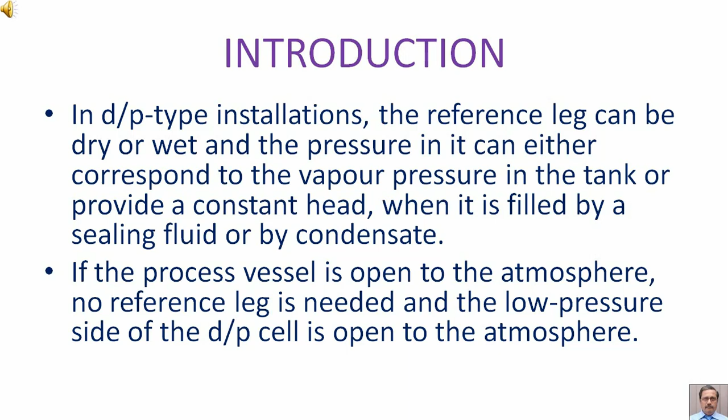Clean liquids in atmospheric tanks. Unpressurized vessels containing clean liquids are the least demanding as far as level measurement is concerned, because the two most common sources of difficulties, vapor pressure compensation and plugging, are not present.

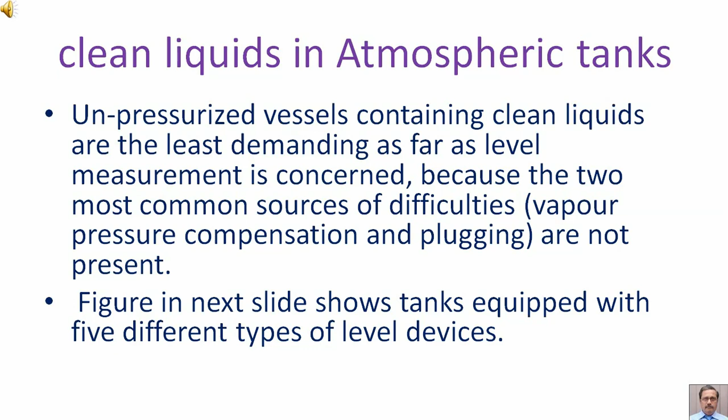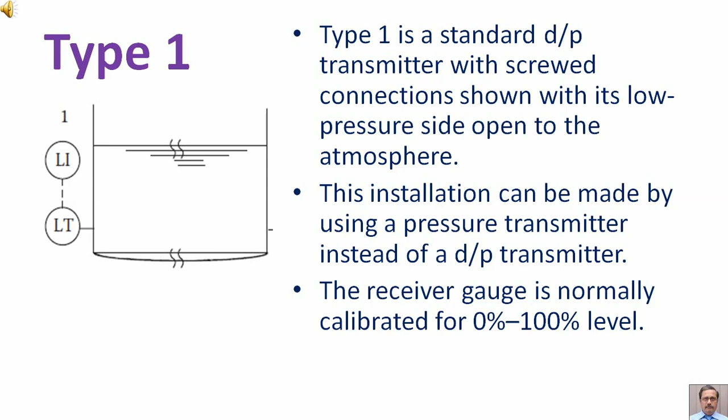Type 1. Type 1 is a standard differential pressure transmitter with screwed connections, shown with its low pressure side open to the atmosphere. This installation can be made by using a pressure transmitter instead of a differential pressure transmitter. The receiver gauge is normally calibrated for 0% to 100% level.

Type 2. The flat diaphragm type differential pressure transmitter is shown in tank installation 2. Compared to the standard differential pressure cell, the flat diaphragm type transmitter is simpler to install and is nozzle mounted, requiring no other means of support.

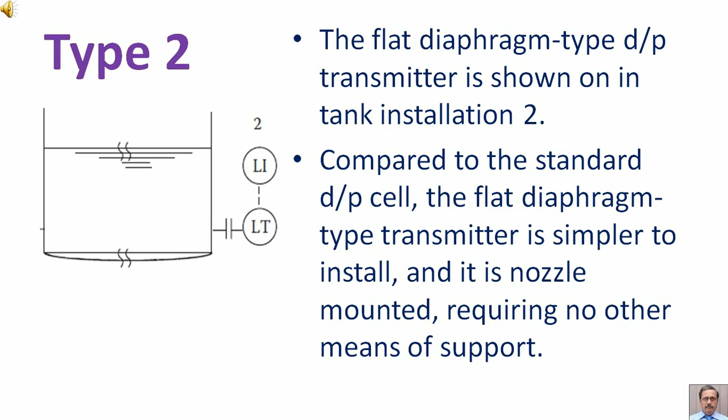It also can be less expensive because only the diaphragm and the retaining ring are in contact with the process. As a result, only these parts must be made of corrosion resistant materials, whereas in the standard differential pressure cell, the entire body is exposed to the process fluids.

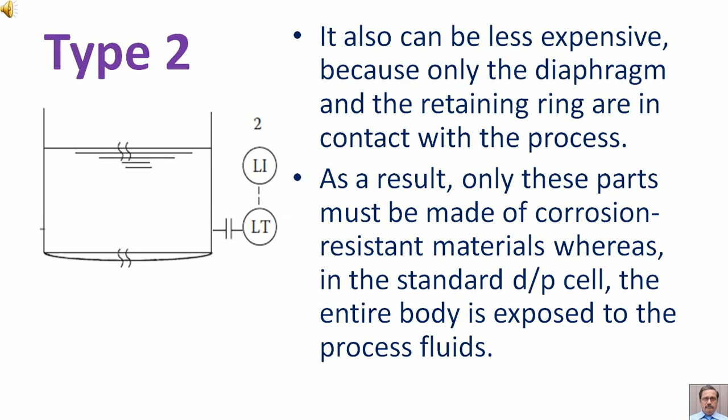Extended mount diaphragm seal differential pressure cell, that is A. Flush mount diaphragm seal differential pressure cell, that is B.

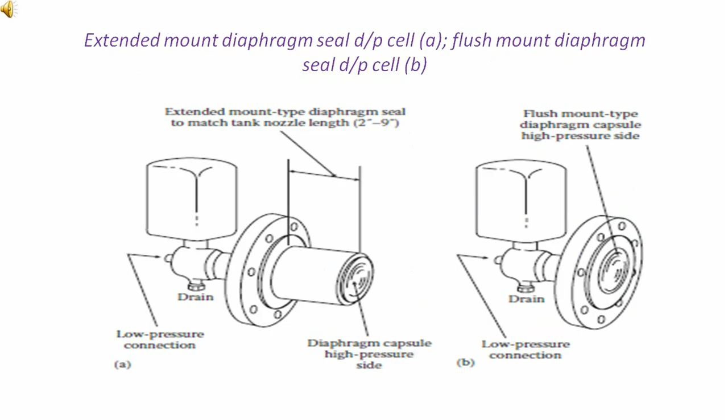Continuing with type 2. A flat diaphragm type pressure repeater can also be used in place of the differential pressure transmitter, in which case the receiver gauge will sense the actual hydraulic head instead of a transmitted signal. A flat diaphragm type pressure repeater is shown in the next slide.

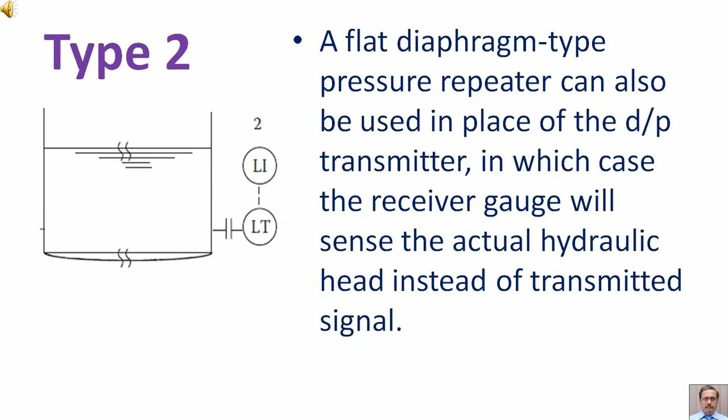Pressure repeater mounted directly on the tank nozzle.

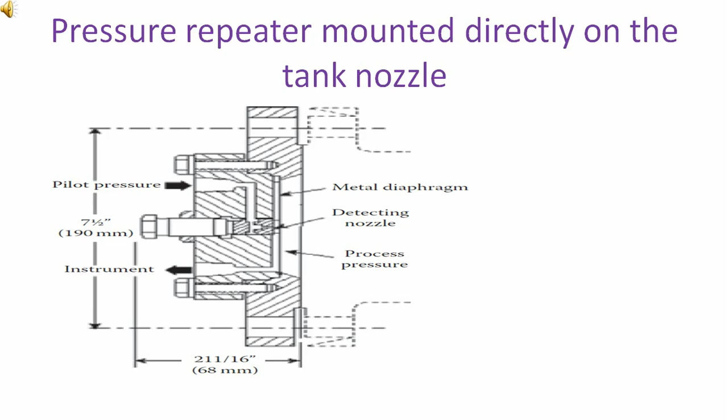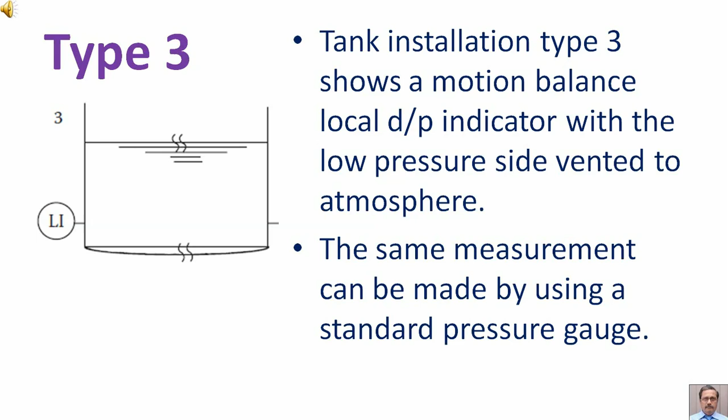Tank installation type 3 shows a motion balance local differential pressure indicator with the low pressure side vented to atmosphere. The same measurement can be made by using a standard pressure gauge. A motion balance differential pressure indicator is shown in the next slide.

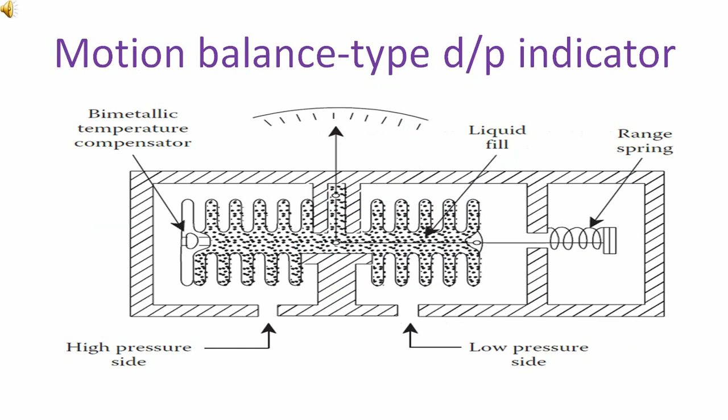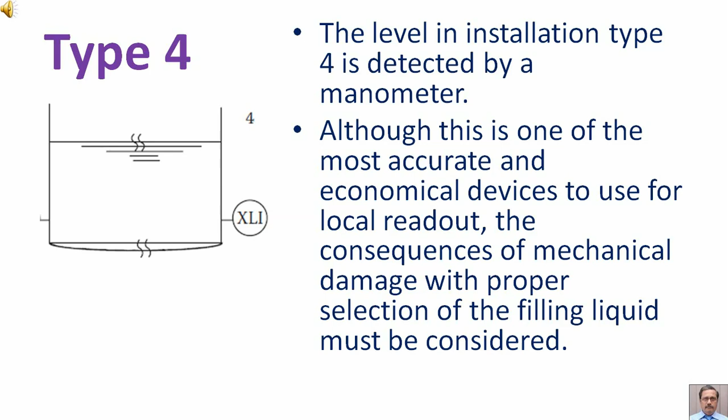Type 4. The level installation type 4 is detected by a manometer. Although this is one of the most accurate and economical devices to use for local readout, the consequences of mechanical damage, with proper selection of the filling liquid, must be considered.

Type 5. The installation type 5 is basically an air bubbler system, which is detailed in another diagram in the next slide.

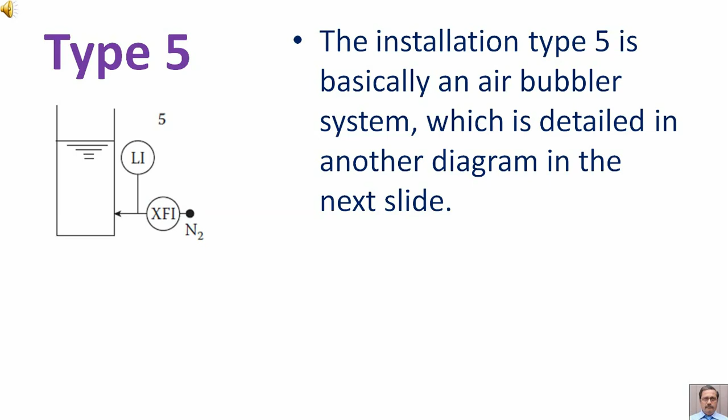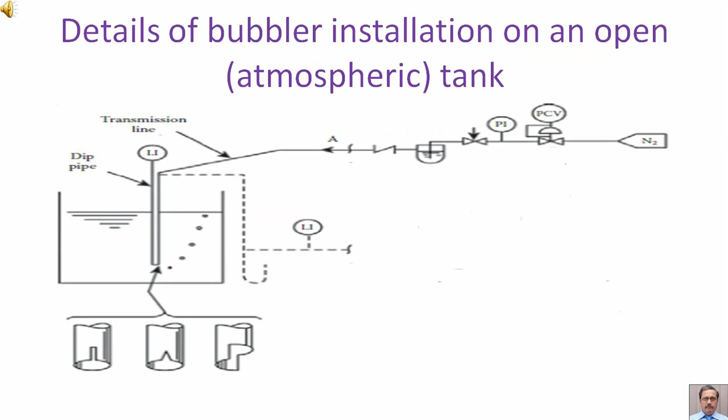Details of bubbler installation on an open, that is atmospheric, tank. Bubbler or purged dip tube. The bubbler or purged dip tube is a robust and simple level and mass measurement tool, often inexpensive.

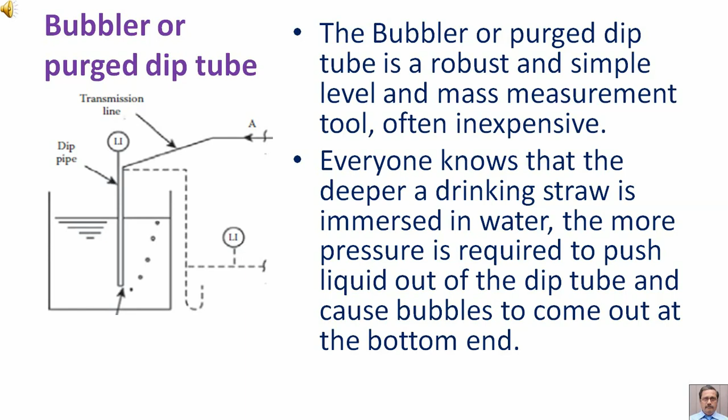Everyone knows that the deeper a drinking straw is immersed in water, the more pressure is required to push liquid out of the dip tube and cause bubbles to come out at the bottom end. Bubbler type level sensors have been in use for as long as compressed gas has been available.

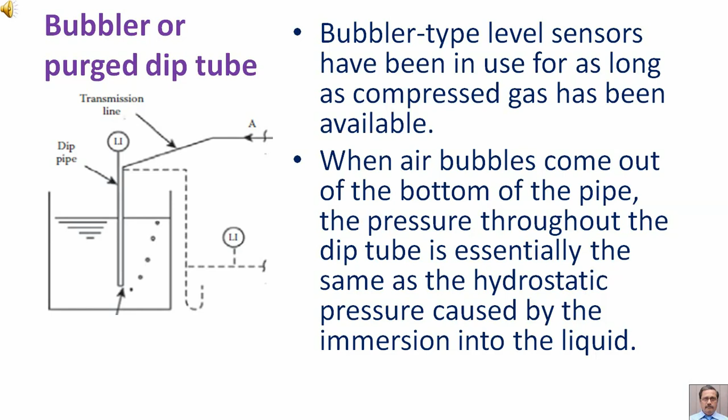When air bubbles come out of the bottom of the pipe, the pressure throughout the dip tube is essentially the same as the hydrostatic pressure caused by the immersion into the liquid. The effect is to transfer the hydrostatic pressure from deep in the vessel to a more convenient location.

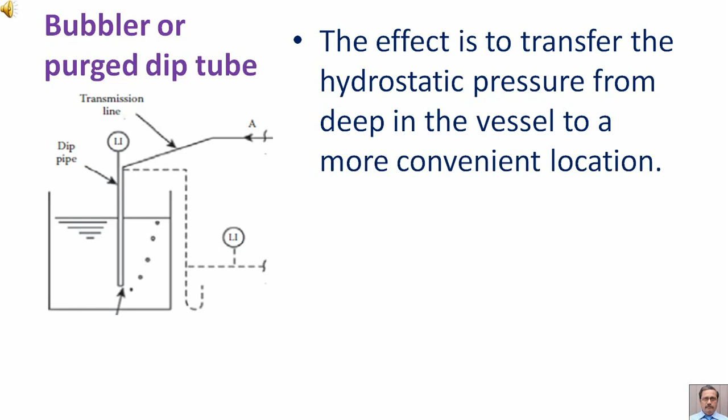Measuring the level in wells. Not shown is a system, usually portable, wherein a miniaturized electronic transmitter is actually lowered by a cable containing its wiring into an atmospheric tank and down through the liquid until it reaches the bottom.

The operator can tell that it is on the bottom when the level indication stops increasing. This is particularly useful for occasional tank gauging and for measuring the level in wells.